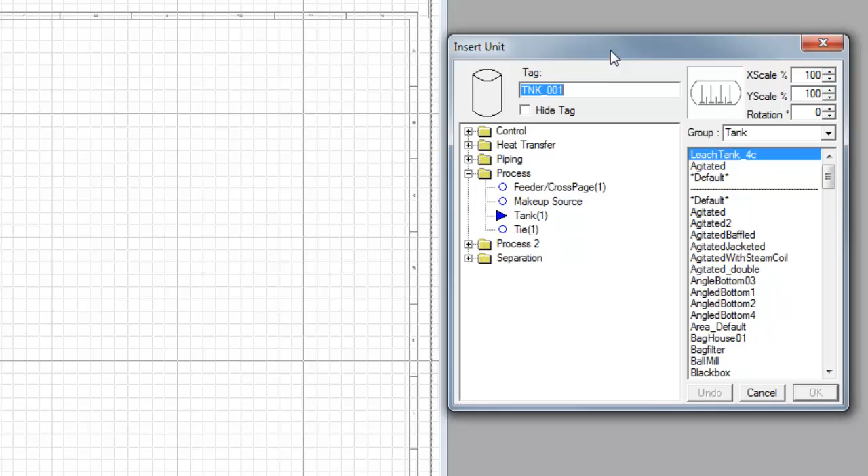So if I say Insert Unit, we get the Insert Unit dialog box, and you'll see that the flowsheet now also has a grid on it, which will help us to place the units.

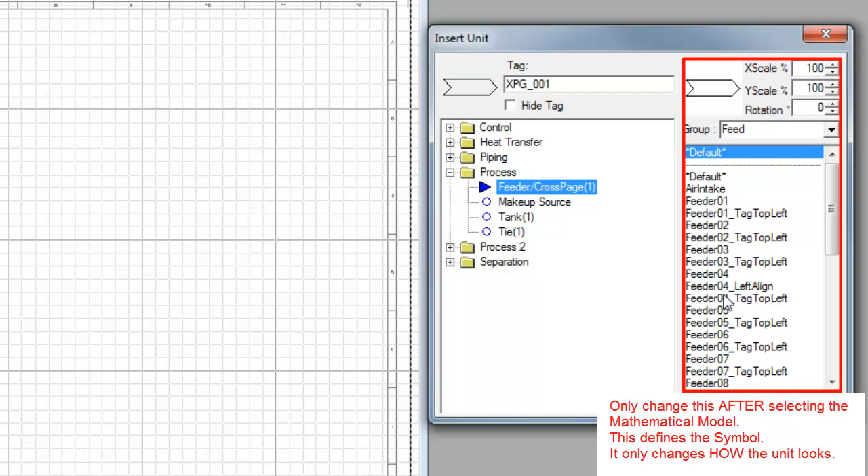So I'll start with placing the feeder cross-page connectors. The dialog box has this left-hand side, which is where you select the mathematical model that you wish to insert. The right-hand side is merely the symbol, as how you want that model to look on your flowsheet. In this case, I'll leave the feeder with a default symbol.

As my mouse moves across onto the flowsheet, you'll see the pointer has changed, and it now shows us that we're inserting a feeder cross-page connector. To place my units, if I hold down my left mouse button, I get some crosshairs, which will help me to place the units neatly. When I release the left mouse button, the unit will be placed, and in the case of this unit, the insert point is on the center of the feeder.

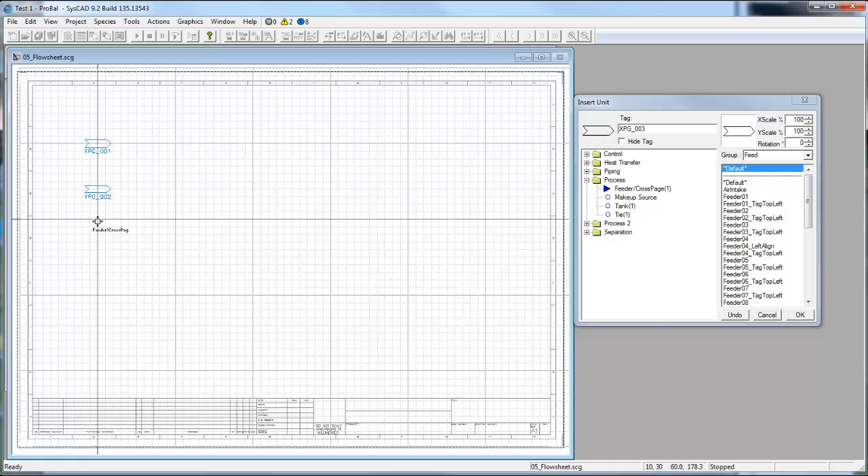So I'll place the 4 feeders on the left-hand side, each time holding down my left mouse button to line it up, and the one down the bottom, and then the 2 on the right-hand side. So I'll place the one down here, and the other one, holding down, I'll line it up with the top feeder on the left-hand side. So those are all the feeder cross-page.

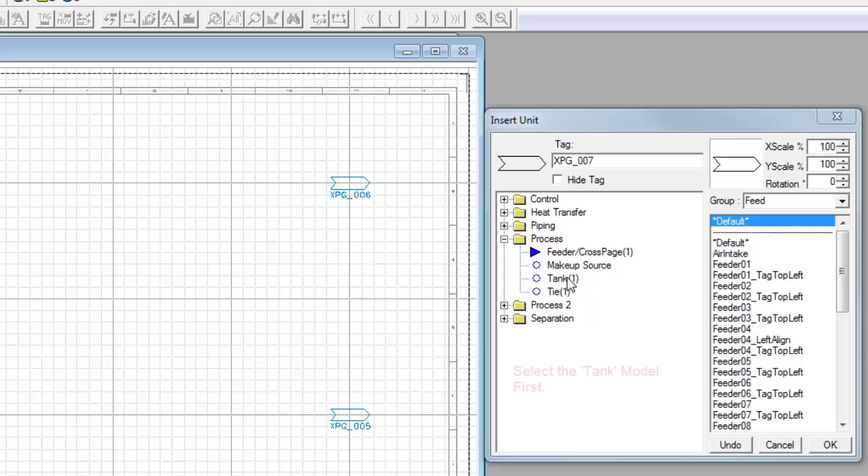Now I go and I want to select a tank model. So select the tank, and in this case, I want the first one to be an agitated tank. So I'll choose agitated from the list here on the right, and there I get a picture of what it looks like. And again, if I hold down my left mouse button, I can line it up and I'll put it there.

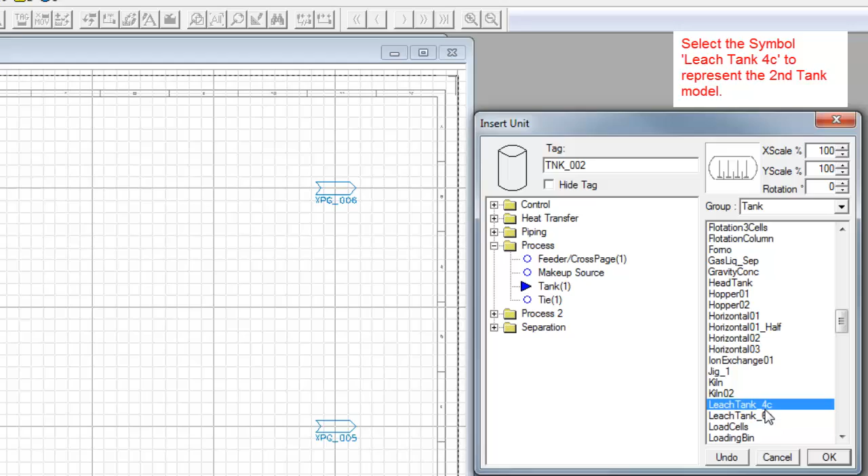And now my second tank, I want it to be a leach tank. So all of these symbols are in alphabetical order. So if I want L, I'll just type in L, and it'll take me down to all the symbols that start with L. And there's leach tank with 4 compartments, and I can see that is what I want. So I can come back here into the flowsheet and I can place that there.

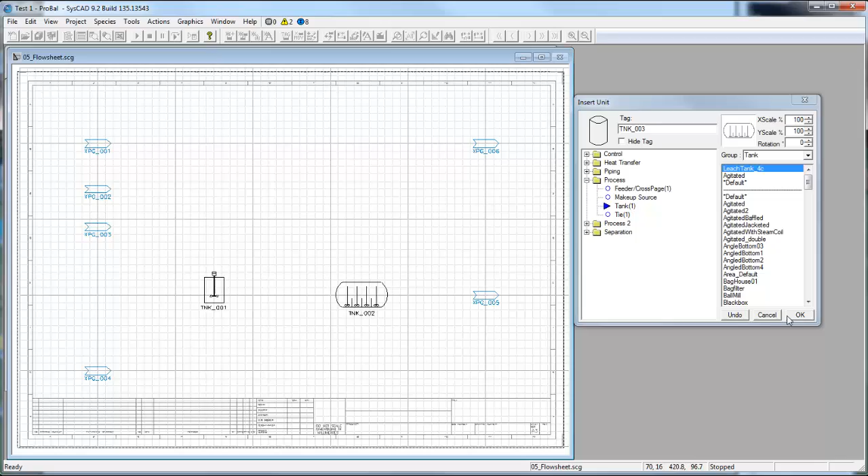And once I've done that, I can click the OK button. Or if I want to remove the last unit that I placed, if I click Undo, it'll take away the last unit. If I click Cancel, it will remove all the units that I've placed in this time. Click OK, and in our next exercise, we'll link the units up.